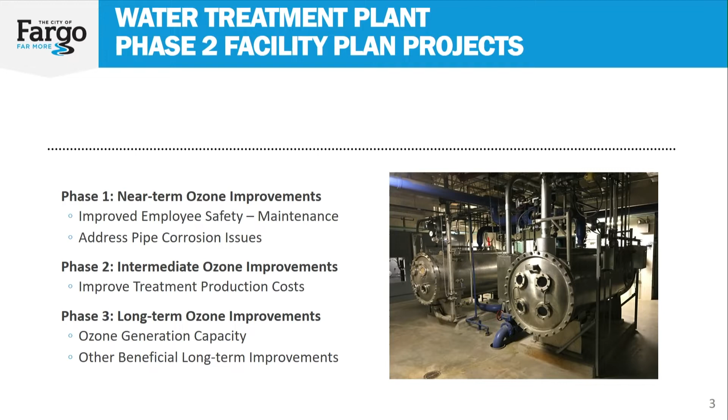As far as phase 2 improvements, we did a filter to waste project, which the Department of Health wanted us to do. So that construction's complete on that. We're looking at doing some work on our pre-treatment process and our softening process, which is basically just repainting and fixing some of the components that we need, wear parts that over 20 years of continuous use are wearing out.

And then the last one in that, it's high service pump station improvements. That's the pump station that pumps water into our water tower. So we're going to look at that, look at some electrical updates and address wear on pumps there.

And then the last one I have, we did some source water monitoring a few years ago, and per EPA requirements, we have to get a little bit of additional credit for disinfection through our existing treatment plant, not the lime softening plant, not the membrane plant. So the lowest cost alternative there was to install in our existing building. We found a spot that we could do it there, so we'll be installing UV treatment, just UV light through the water, and that'll fulfill that disinfection requirement.

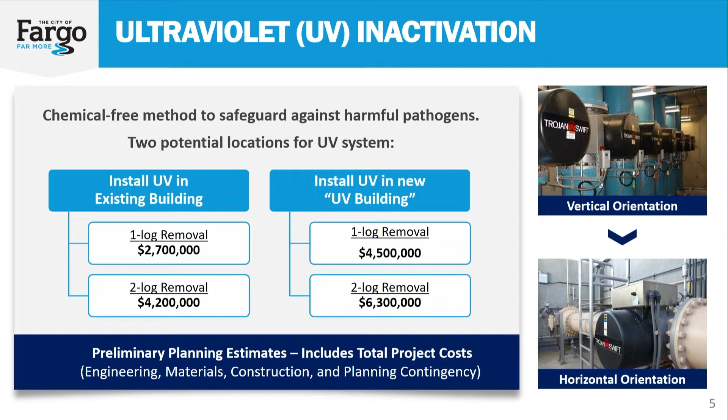But that's it. I know it's very brief, but if you have any questions, I'd be happy to answer them. It's just to fulfill an SRF. Troy, the total amount of your loan is how much? The total amount is $24 million. Any questions of commissioners?

Just Mr. Pepcorn, a couple quick ones. So this is a low-interest loan from the state of North Dakota, and so this is a program that they did that we're taking advantage of, correct? Okay, and then one follow-up.

Could you talk a little bit about the reconfiguring of some of the lines? I know you don't have a diagram, but could you talk about that and how much you saved?

That's very impressive. We're still assessing the cost, but we're feeding reverse osmosis water. Customers have been getting that since late last September through the new plant. We haven't sent finished water out of the new plant, but every month it appears we've saved money over the past, and we're well into the six figures as far as cost savings. So we're really happy about that.

So what you presented in finance, the pipe change, has changed our cost in chemicals and such. And the secondary thing is the taste is still wonderful.

It helps with the taste, and we've actually been monitoring that all through the flood and everything. We've had a good spring as far as taste and odor compounds and stuff.

Usually in the spring you have some odor issues. We've been monitoring our source water, and there was a time when we would have considered switching to the Sheyenne River because of concern about taste and odor compounds. But since we had the data, it showed the river was fine, or that the Sheyenne was actually worse, so we kept on.

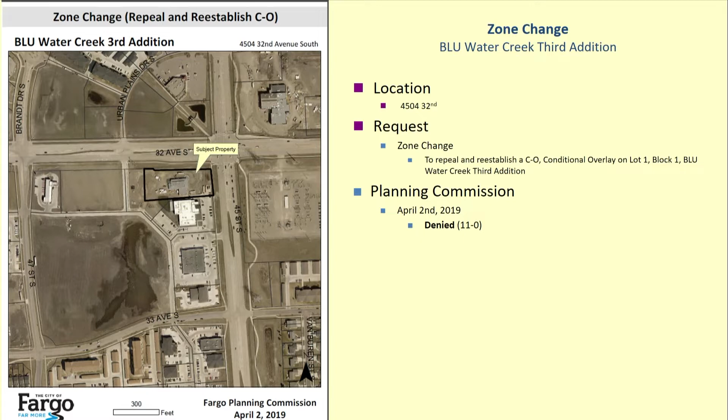So our first case is the BLU Water Creek 3rd Addition. This is here on 32nd Avenue South and 45th Street South. Again, there is an existing conditional overlay on this property. These conditional overlays include design guidelines for both the buildings and the site. As we look at that with the zone change, that accompanies the LC limited commercial zoning there. And one of the guidelines in that conditional overlay prohibits off-premise advertising, that is billboards, on that site.

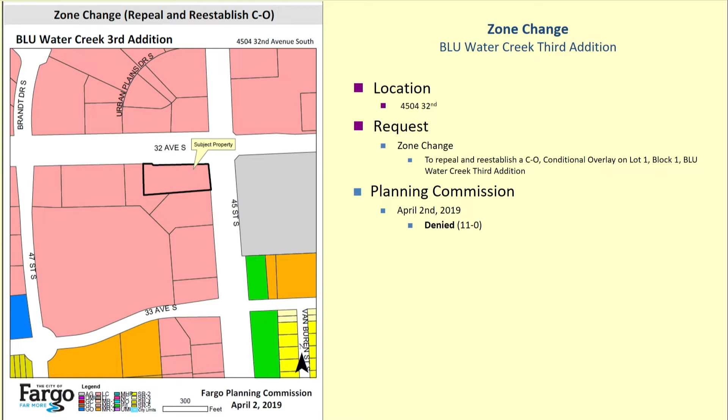The applicant is requesting to repeal and reestablish the conditional overlay in order to allow an off-premise sign. Here is a plat of the BLU Water Creek Addition. So again, here's 32nd, 45th. This is the approximate location of the proposed sign.

The prohibition against off-premise signs was included in the original conditional overlay for this property in 2003 and has continued to the current conditional overlay despite other modifications that have been made to that original conditional overlay.

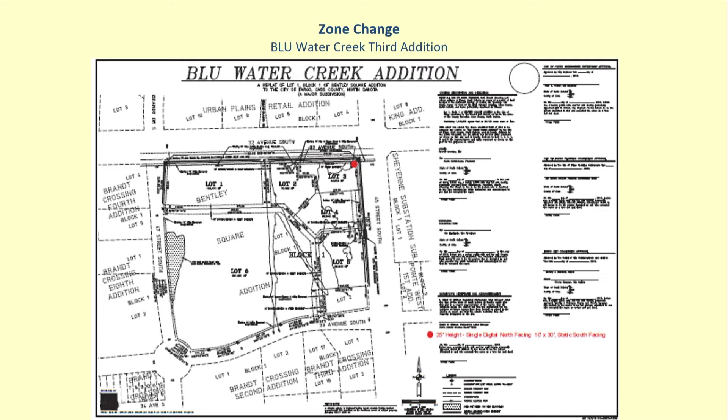And so the sign detail here, these images were provided by the applicant. This sign actually is oriented to read from 32nd. It sort of looks like you can read it from 45th there, but it's really oriented from 32nd here. And again, here's Urban Plains across the street here.

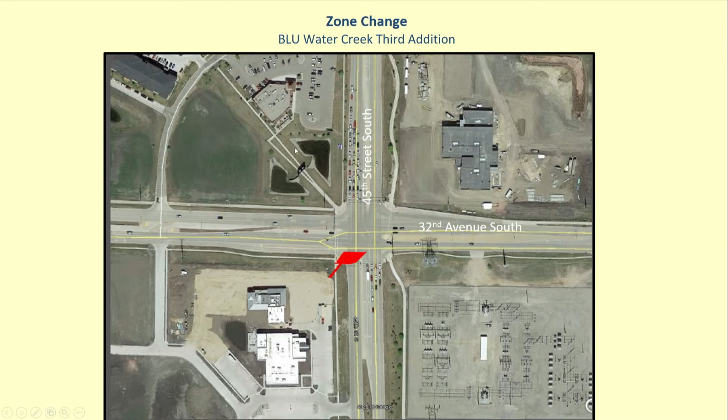That just shows the height of 25 feet there. This would be a 300 square foot sign face with a height of 25 feet. It would have a digital sign facing east on 32nd, and a static side facing west along 32nd Avenue.

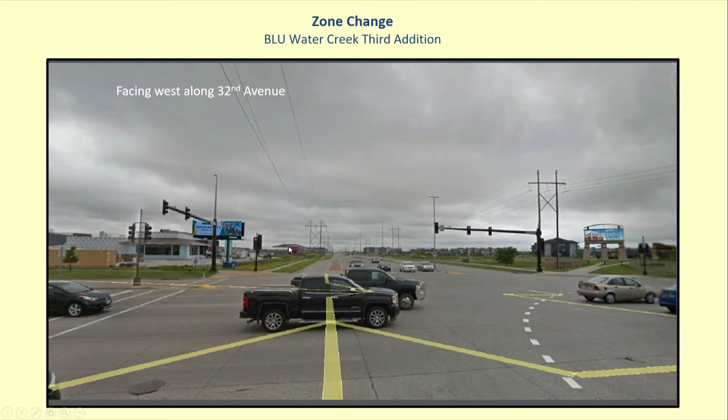Here's a photo simulation again. So here you're facing west along 32nd Avenue, and this would be the static side, and then the digital side would be on the other side. So this is proposed. This is about where it would be.

That's the existing actual Urban Plains sign. There probably is not a stripe across the truck. That's something. So that's our first location.

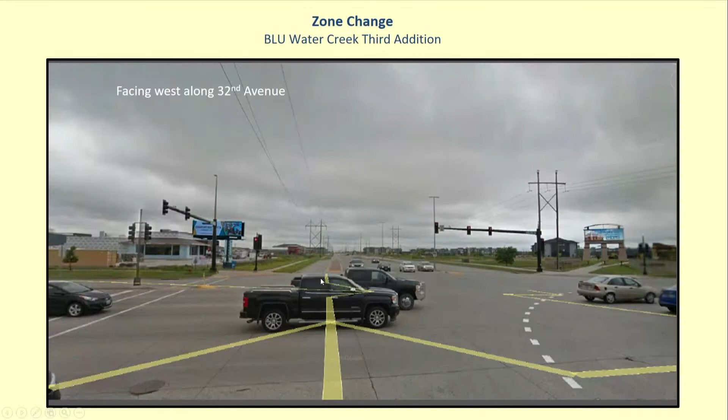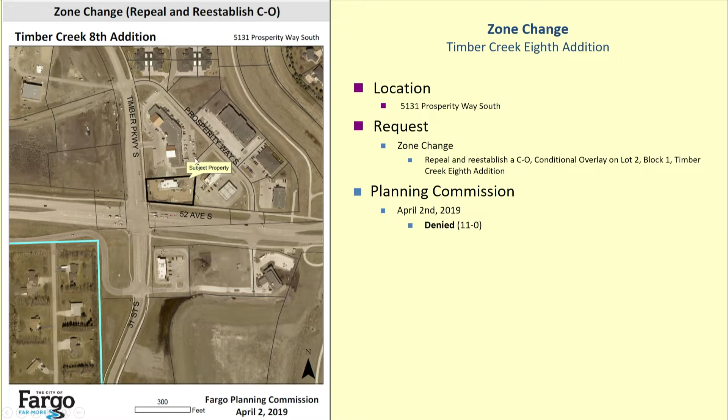And that's location number 1. Location number 2 is the Timber Creek 8th Addition. Here we are on 52nd Avenue South, Timber Creek Parkway. The cash-wise is over here. Again, this area is zoned GC General Commercial.

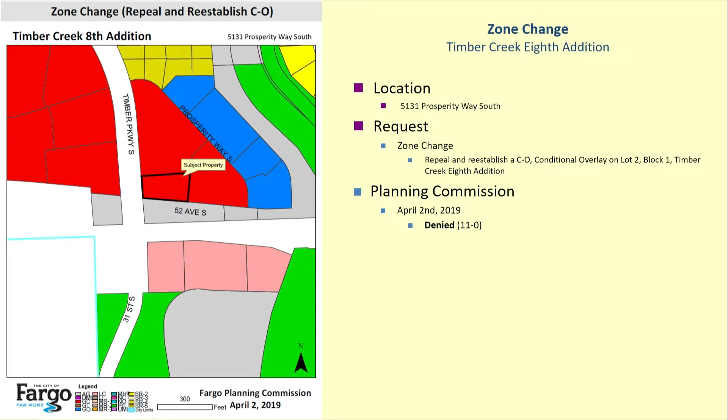Again, this has a conditional overlay that the applicant wants to modify to remove the prohibition on off-premise signs. That one was again in the original conditional overlay and is continued in the current conditional overlay. So here we are down here, approximate location of the sign.

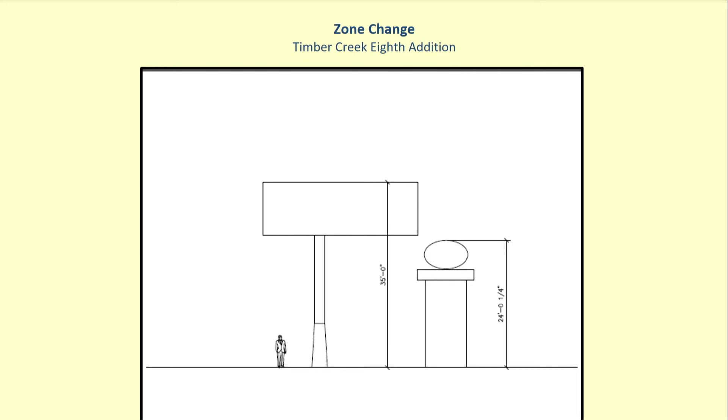We have some more photo simulations from the applicant here. Again, this is facing on 52nd. This would be a sign of 35 feet high. And it would have 2 digital sign faces, one facing each direction on 52nd Avenue.

So here's, again, a simulation. Here's 52nd out here, and here we see the location. There's the Dairy Queen, our landmark there, and the approximate location of the sign.

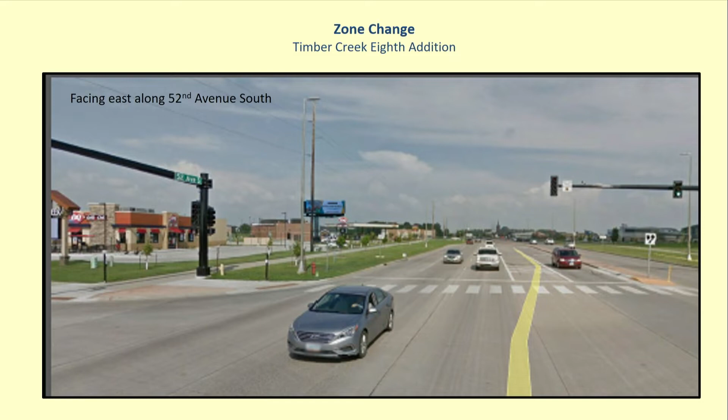Commissioners, these and a couple other cases which are not before you at this time were presented to the Planning Commission at the April 2nd Planning Commission hearing, and staff had recommended denial of these requests. The Planning Commission affirmed this recommendation of denial by a vote of 11-0, a unanimous vote to deny these signs.

The basis for the denial is stated in the findings in your staff report. The proposed modifications would be opposed to the original intent of the conditional overlay. The City of Fargo has many conditional overlays along arterial roadways south of Interstate 94 that prohibit off-premise advertising. There's a lot of billboards south of the city and more toward the Main Avenue area, but there's a space in there where there isn't any off-premise advertising.

As development along corridors in the southwest area of Fargo began, including the corridors of 45th Street South, 32nd and 52nd Avenue South, and Veterans Boulevard, many of these areas were intended for commercial or mixed-use development that were zoned with a conditional overlay that established design standards for the development, among other things, and also prohibited off-premise advertising. The intent of this prohibition along the corridors was to not replicate the many off-premise advertising billboards found on Main Avenue and University Drive South.

Approving this application would establish a precedent of how these corridors will develop, and it is likely additional applications will be submitted to make similar requests. The Planning Department doesn't feel that approving these modifications to the conditional overlays to allow off-premise signs would be going along with the intent of those and keeping the look we want for those entryway corridors to the City of Fargo.

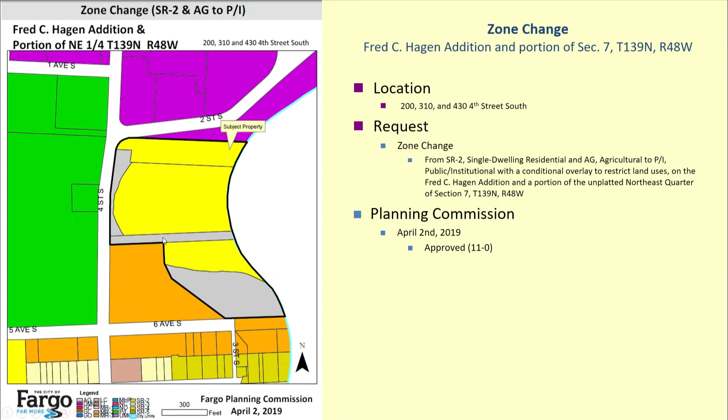Commissioners, I believe you'll all recognize this location as the area where Dike East and Dike West is, the skate park. Across the street is Island Park Playhouse. There's a City of Fargo lift station up here. This area is zoned: the yellow would be SR2, single dwelling residential, and the grayish blue there is agricultural. Here we see those uses laid out. Just for reference, this is Prairie St. John's. They are not part of this zone change, but that's just a reference point. And the dike that's there, and the facilities here on the Dike East.

So this is some people refer to it as a cleanup zone change. The applicants here are the Fargo Park District and the City of Fargo. The city owns this piece up here, and then the park owns these larger pieces. The request is to change from the existing SR2 and agricultural zoning to PI, public and institutional. The SR2 zoning is not appropriate for this location, as due to its proximity to the river, it can't be developed with single dwelling residential uses. As the property is owned by the City of Fargo and the Fargo Park District, both governmental entities, the PI zoning is the appropriate one.

Also added to this is a conditional overlay, a little different than the way we used that term earlier. This conditional overlay restricts the land uses basically to the ones that are there. The public and institutional zone is used all over the city, and it's possible to put a variety of things there. For instance, the city garage is in the PI zone, and you wouldn't probably want a big manufacturing thing right down there by the river. So again, it just restricts it to the uses that are there.

Those are enumerated in your staff report: parking, the City of Fargo lift station, the skate park, and the Dike East and West parks.

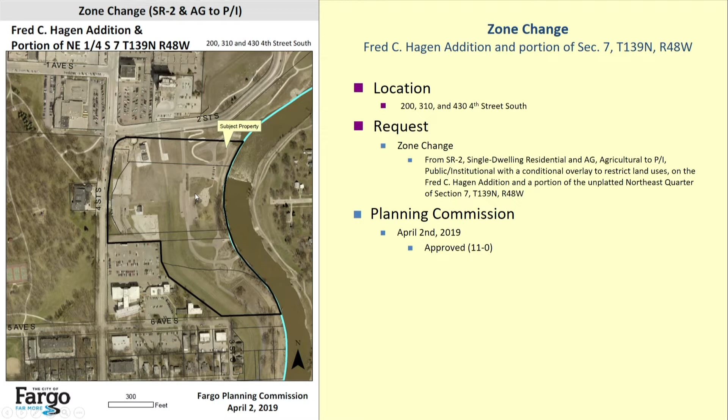At one time, this part of Fargo was once part of Moorhead, and the river was altered in course. Mr. Johnson, was it 1962 that we did that? Okay, and it was modified. And if that name Fred C. Hagen sounds familiar to you, Mr. Hagen is a former city commissioner, and there's a plaque commemorating his service to the city on the 3rd floor of City Hall. So that ties that together.

The applicants, the Fargo Park District and the City of Fargo, are here. Well, I guess the Park District is not here, but we don't believe we have any comments. Does anyone present wish to speak to this zoning change? If not, we'll close the public hearing. Can I have a motion? So moved. Is there a second? Second. Moved and seconded. Any further discussion?

Roll call vote, please. Grindberg. Aye. Strand. Yes. Piepkorn. Aye. Gehrig. Yes. Mahoney. Aye. Thank you, Commissioners.

Thank you, Donald. Thank you for reminding us spring is coming, Donald, too. I like that green jacket. Appreciate it. Thank you. I got it in Los Angeles on my recent trip there.

Kent Costin presented the recommendation to extend a loan with Wells Fargo totaling $100 million for a 2-year period. Kent Costin to explain. Yes, good evening, Commissioners. I'd like to tee this up and have John Shockley actually go through some of the detail of the terms and conditions of this renewal.

This loan is for $100 million, and it's an extension of the loan we took out to provide diversion funding. I'll let John explain that. It's the same structure, essentially, for a 2-year renewal commitment.

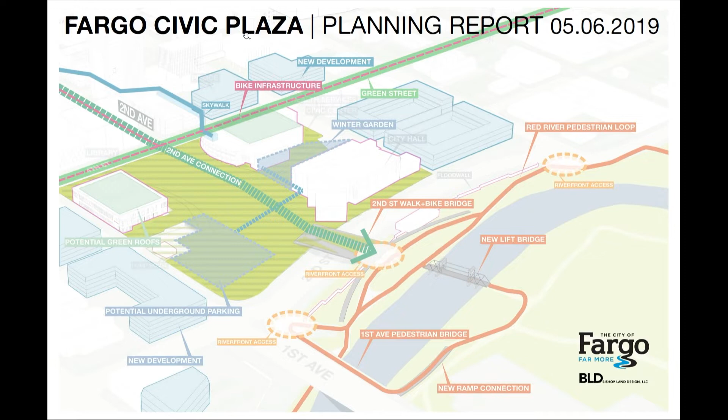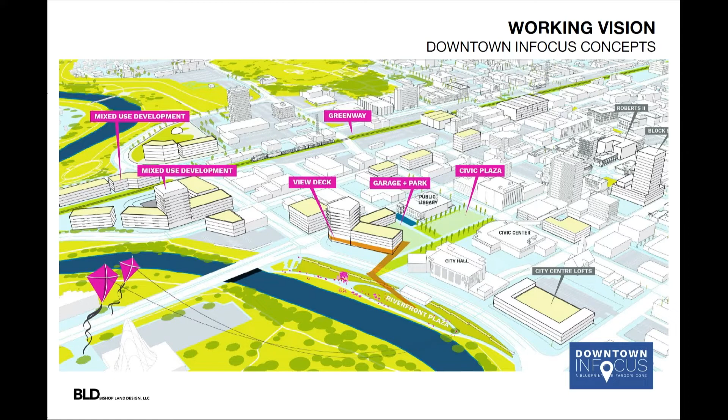Initially, this work has come out of the Downtown InFocus work that we did starting several years back, and that's where we really saw the potential for the Civic Plaza to be a key and critical part of the downtown redevelopment. We are in the process of building this vision.

This vision is really about trying to understand how we conceive of a public plaza of this nature. It's a civic plaza, so we came up with this little equation: it's about democracy, it's about ecology, and it's about program. To us, that's what starts to form a civic plaza.

But there's much more. It's about talking to the people that are part of this process. You can see we've talked to many folks in the city of Fargo, several commissioners along the way, the Performing Arts Center Task Force, which I'll outline a little bit of the work we've done there, the Plains Art Museum, NDSU, et cetera.

You can see in this particular slide the spatial relationship between all these people and the importance they can bring to the table when we think about programming, as well as how we connect to each one of these entities. So we've been touching base since November and through April with all of these folks to understand how they can play a role in the formation of the areas surrounding, feeding into, and the plaza itself.

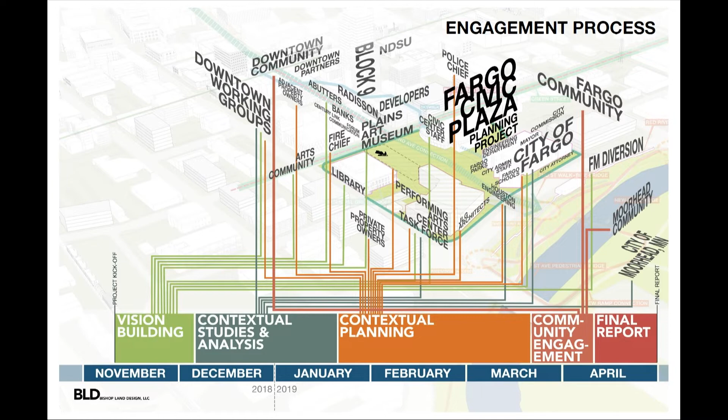So we know that it's tied to a bit of history, right? We know that it's tied to the river. It's about what Fargo is historically, but it's also about how we understood the civic space.

Going through this process, we want to make sure that what we're looking at is actually capable of being a civic plaza, and that has a lot to do with how we understand programming in terms of celebration, gathering, discourse, as well as understanding other precedents to make sure we can understand the scale of this space and if it is appropriate.

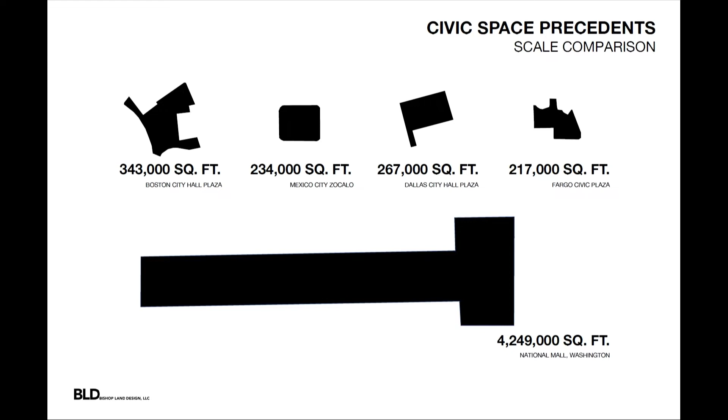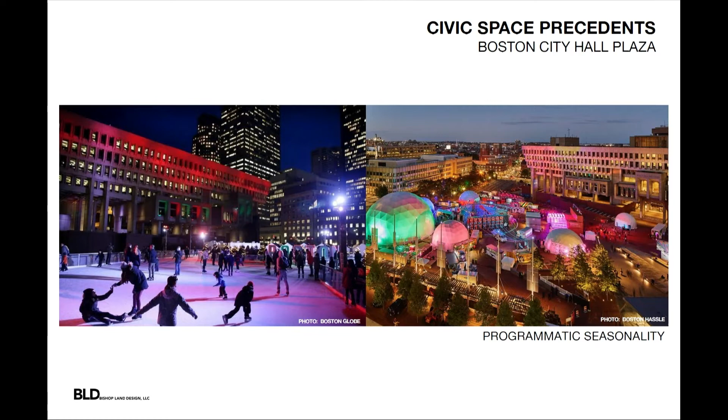So we looked at a couple different spaces and their key and critical features. One was the National Mall, certainly a different scale. Sometimes we understand our scale by understanding that other scales are too big. So it's not a national mall, but it is a civic space like we've seen in Dallas. We look towards the things that are successful in the future design of that plaza: programmatic flexibility, understanding programmatic seasonality like they do in the Boston City Hall Plaza, and understanding civic expression like they do in Mexico City.

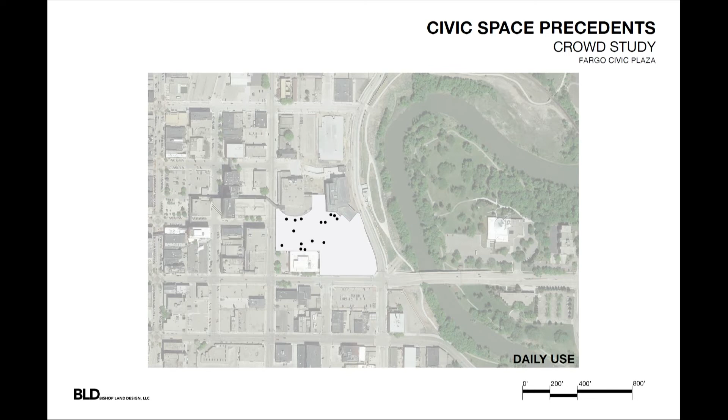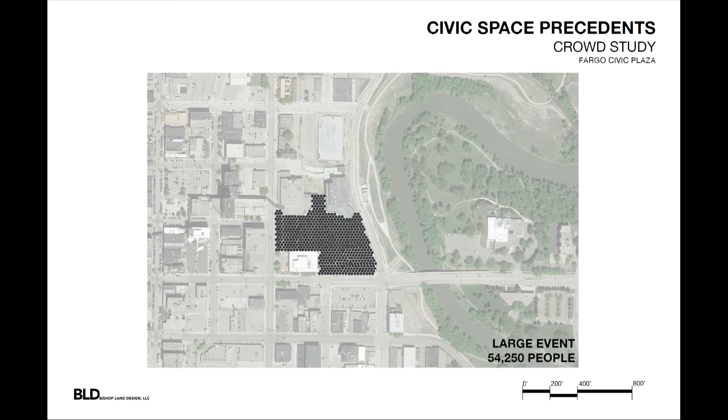Each one of these things looks towards a scale, and the thing that we did to prove out whether or not this was the right scale was to look at the populations that each one of those civic spaces would hold, as well as what this space can hold here in Fargo. What we have found is that this space is actually to the scale - we can fit up to 54,000 people in this space. So it's not small, and it's a place where all of Fargo can come to gather.

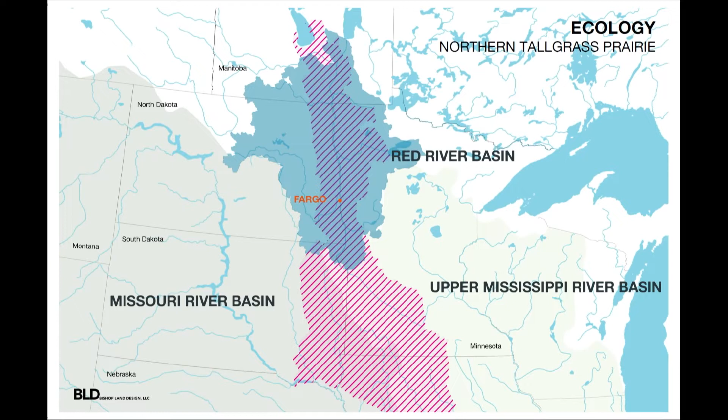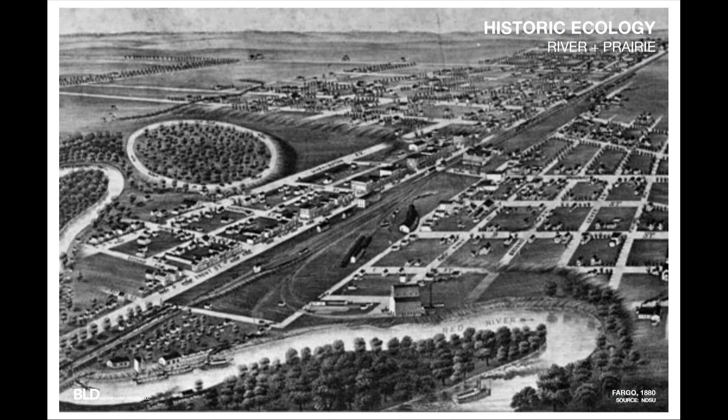Ecology, as a human ecologist, but also as we've talked before, is something that's very important to this city, and making the connections that are key and critical for the health of species and the planet. In terms of the relationship, many of us think about the northern tallgrass prairie, but in essence this relationship is also about the riparian forest. This forest was what helped build Fargo over the years - there would not be a Fargo without a forest, they say.

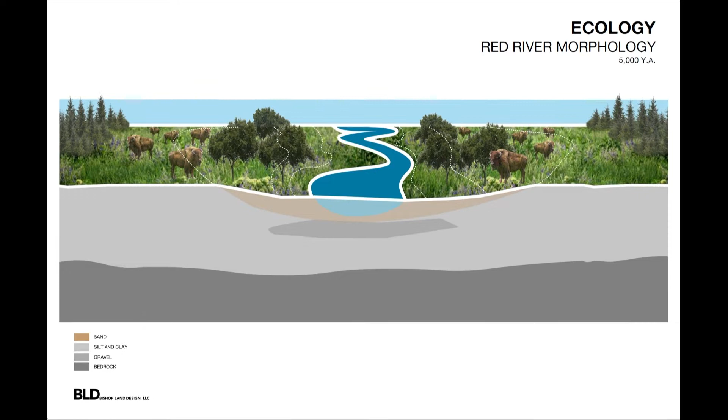We understand that there are challenges in Fargo related to the river morphology and the ancient glacial lake that was once here. So we understand that some of those challenges are going to be part of how we manage the space, and we do that with living materials. Hybridizing the river ecology, as well as the urban ecology and plant ecology together, is how we start to think about the potential of this particular plaza.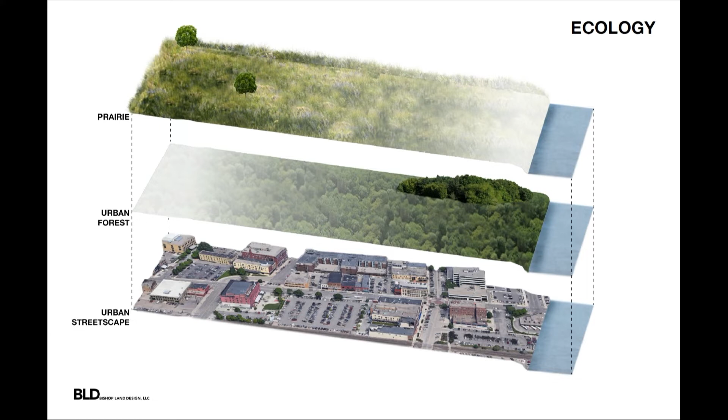Prairie, urban forest, and streetscape, all of these together actually bring the functionality and help us understand how we might manage stormwater, as well as give a unique place for people to be.

Understanding this also leads us to understanding hybridized infrastructure, right? Things that are hard and things that are soft, and how they go together, and how we combine living and static things. We understand that writ large in the city is into how we manage stormwater.

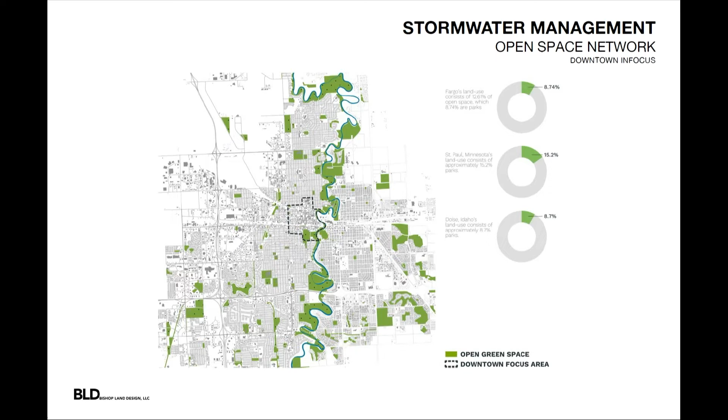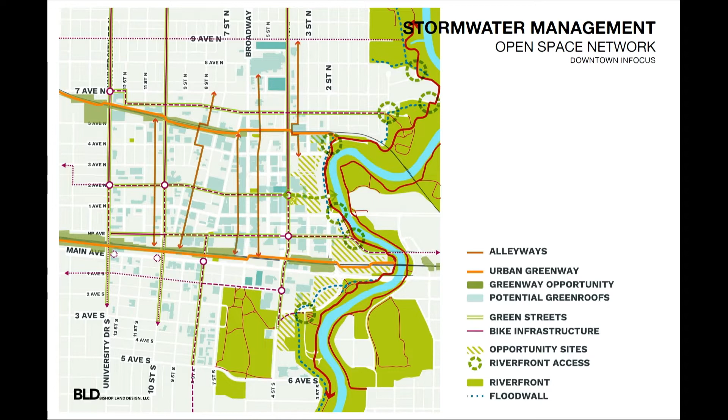Water is an important resource, as we heard from before, as well as an important resource about how we manage locally. It's tied very much to the open space network that we talked about in downtown Fargo. How is it that we can make sure we have connectivity through living systems, as well as how we might manage this on the plaza itself?

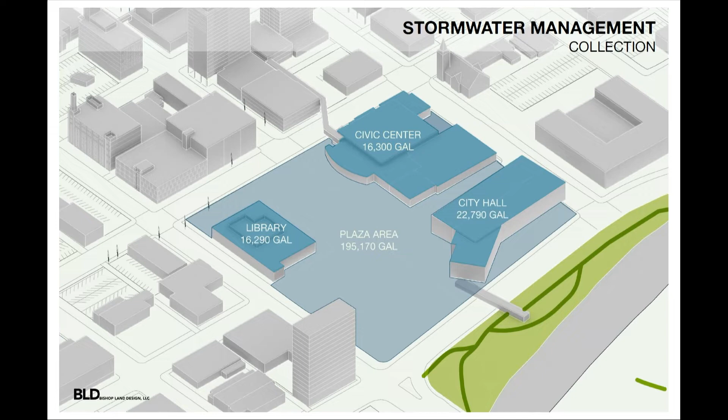Thinking about this more specifically, we can actually start to do calculations. We can understand how much water is actually generated in a year on each one of these hardscapes per se, and how much water we could collect even just from roofs and plazas to be utilized in this space.

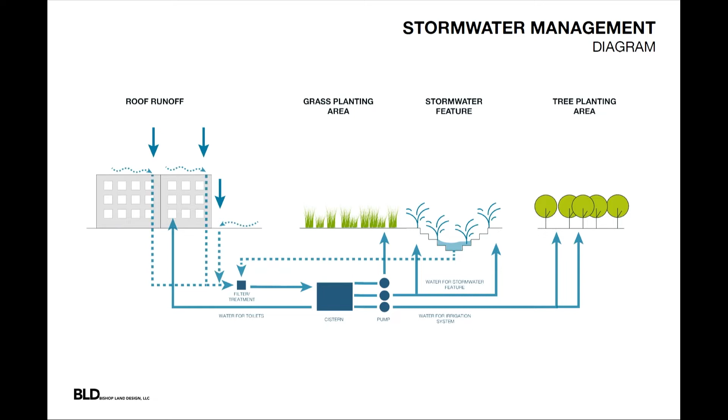What we might do with that is actually starting to think about - do we start to use it as irrigation? Do we start to use it as some sort of stormwater feature? Do we start to reuse it in buildings or in tree plantings? All of these are great potentials for us to understand how to reutilize this important resource.

These things can occur as a hardscape or they can occur as a softscape, so we have a lot of opportunities as well to think about that.

It's very important as part of this process to understand the space and analyze the space. In essence, if we show you a bunch of pretty pictures and they're not true, when I come back later and tell you we can't build it, it's not a good thing for any of us.

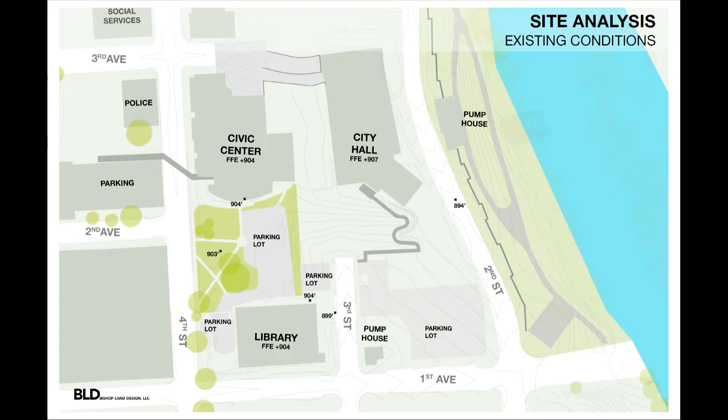So we want to make sure that when we look at this space, we understand there are complexities, and this is just an existing condition map. But in essence, if we look at it under all the jurisdictional overlays as well as the utilities, we understand this is a much more complex space, which has its own rules and regulations that we have to follow, both from a natural course, but also from a utility standpoint.

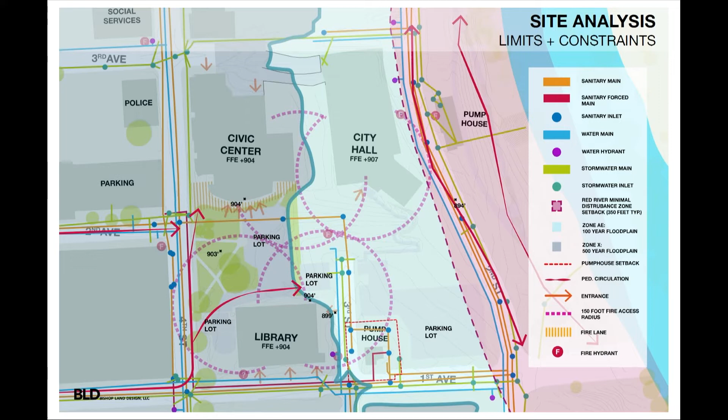So if we take that and try to understand the context as well, what are the things that influence the space and how we use those in design?

We've done things like study how the shadows work throughout the year and throughout the day. Is there a warm spot? Where are the cool spots? Where are the windy spots, right? Where can we utilize the cooling action of the city when it's most necessary?

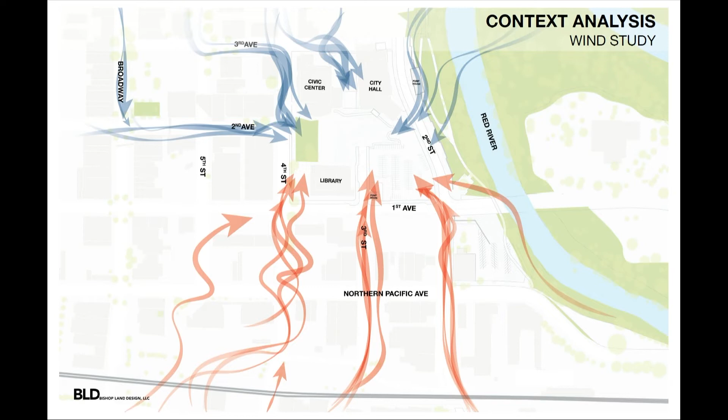You can see 2nd Ave is quite a windy corridor. I think you all know that, as well as how that fits into the larger imagined networks that we've worked so hard on in the downtown planning process.

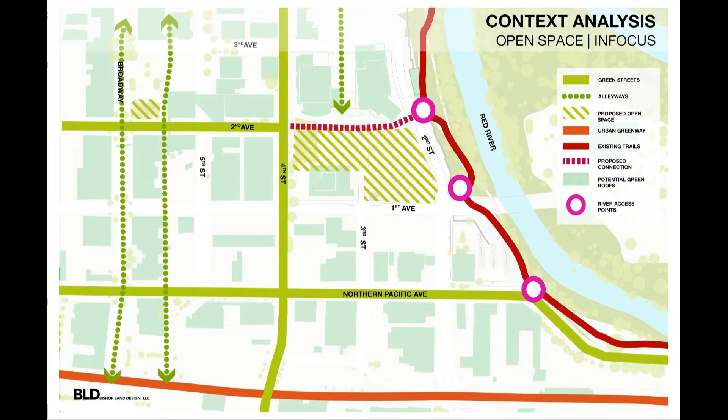So we've taken a closer look at some of that contextual planning, because the success of this space is actually tied to its externalities, not just the things that happen on itself. So we've come up with this idea of the expanded network - how do these open spaces connect Broadway and how 2nd Ave makes its way to the Civic Plaza?

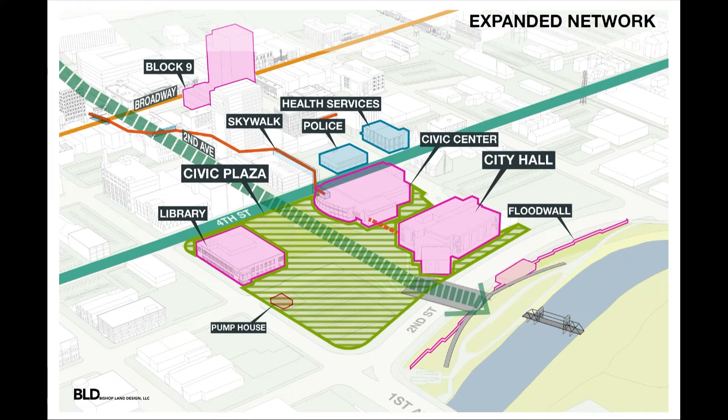This again reiterates the work that we've done previously, but now we start to understand what might actually happen in some of these spaces and how we can reorient them specifically towards the uses of the plaza.

First of all, we consider how we make that key and critical connection to the riverfront. This is something that we have lost since the flood wall has made its way in front of this space. So we've talked to staff, we've talked to Fargo Parks, we've talked to many folks that we've engaged with about how we might actually accomplish this.

In fact, this was one of the goals of the diversion, to connect via a bridge. I think what we've tried to do is give that a spatial quality and understand how that connection can be meaningful. So we looked at 3 options.

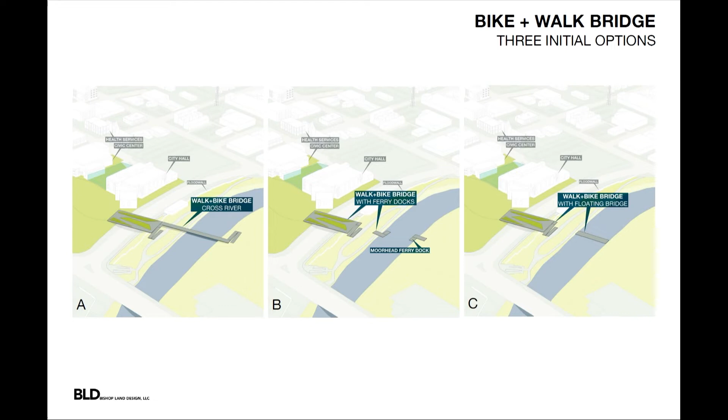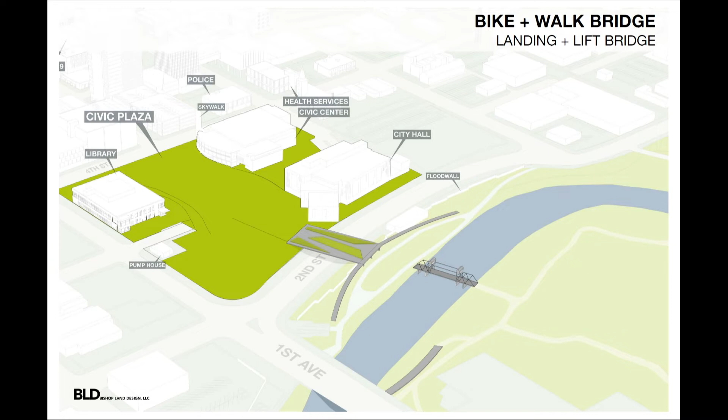We found out that none of those were right. So we came up with a 4th option, which is really this broad connection that allows us accessibility, but also a secondary connection to Moorhead that we believe helps unify the 2 banks of the Red River. It also connects to a larger expansive north and south network of space along the river.

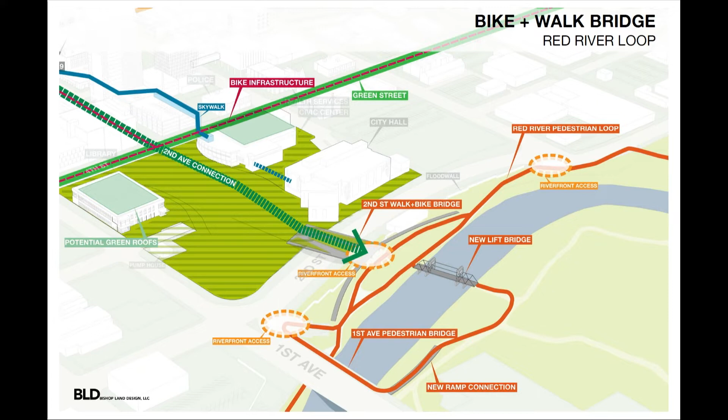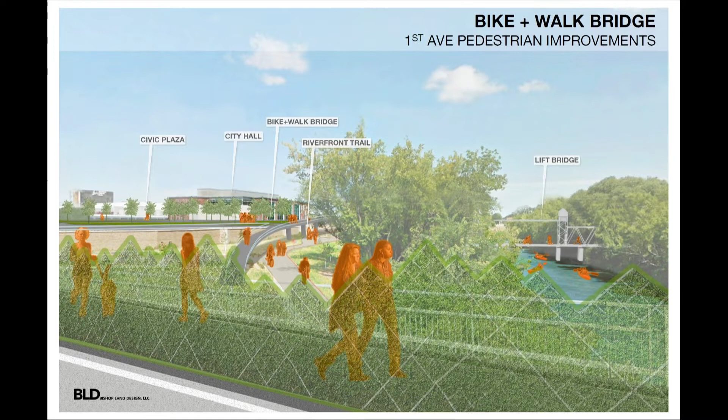Once we key those 2 things together, the expanded network and that riverfront open space, we actually activate much more of this continuous network that will help build Fargo in the future. We also looked at what this might mean in closer detail: how do we take those connections over the bridge and enhance people's understanding of the river, but also protect them from what can be a somewhat hostile environment along the bridge.

2nd Avenue also plays a key and critical role as we look to connect Block 9 to the Civic Plaza. We looked at 2 options: one was a reduced roadway, another was looking at this as a shared use corridor, or as some of us with Dutch heritage say, a woonerf.

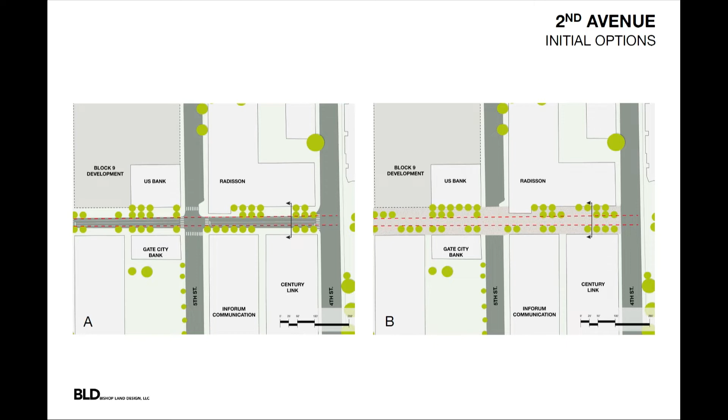That means cars and people share space, and that may not be jointly at the same time, but it can be. It allows us to close off portions of the street for events, and it also slows down traffic when it does share that space with pedestrians.

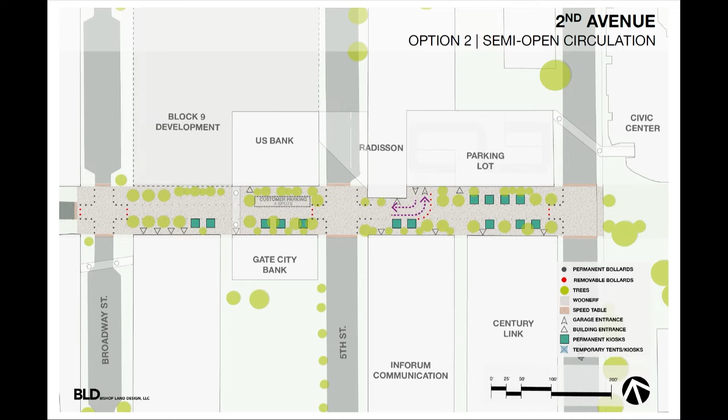We've also talked about putting in permanent kiosks to help activate 2nd Avenue, since its current facades are unable and unattainable for activation. These kiosks work better than a hot dog stand where you can't get out of the weather if you're buying a hot dog; in the wintertime you'd be able to utilize these kiosks. We still allow access to the parking lot and garages, and we look for ways to enhance that later on.

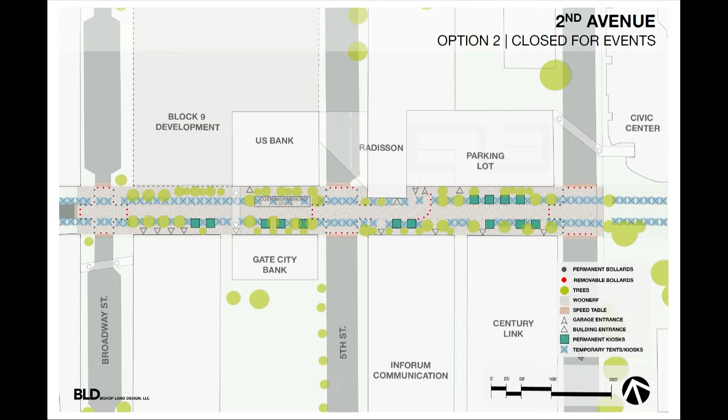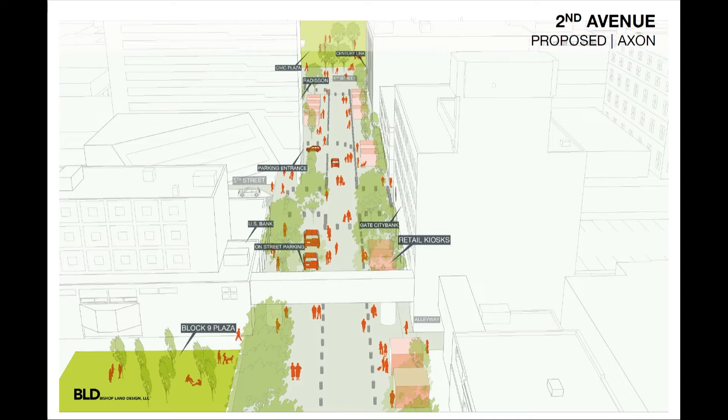During events you can also fill in the teeth, so to speak, and make this a very large and activated space connecting from Block 9 all the way to the plaza. This proposed axon shows the type of activation and the types of elements that would be in this particular space and how we would see that connection occurring.

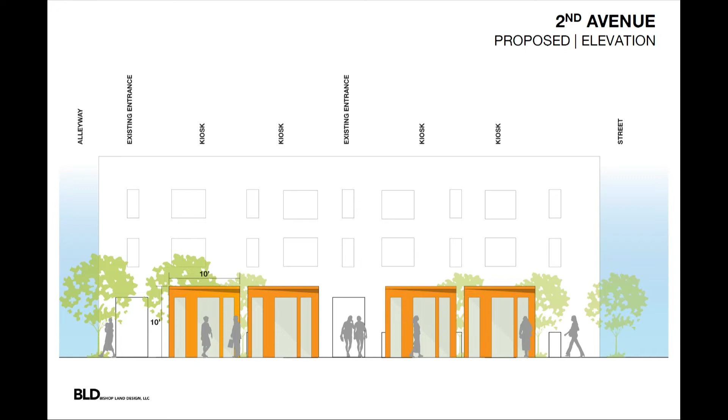The kiosks themselves are small, micro retail, and they allow people to start businesses and then grow them into other larger spaces. Being conditioned, they allow folks to get out of the weather, whether it be rain, sleet, hail, or snow—like today, it's fine just to be outside, which is nice. So these kiosks actually help activate that street and bring folks together.

Briefly on 4th Street, the real goal here is first to calm traffic down and bring that plaza slightly out into the road profile. This allows us to do some of the enhancements we talked about in the downtown plan, capturing stormwater off that road and bringing it onto the plaza as an element or as irrigation.

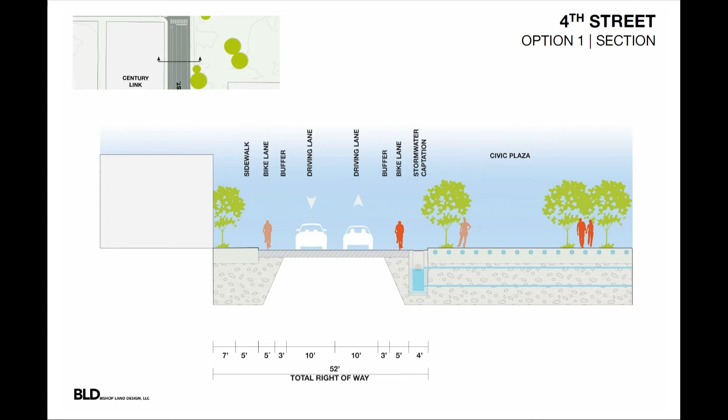So the contextual planning outcomes really create this kind of expanded network, which we talked about, and we can see how it activates all of the development that potentially surrounds this plaza. That's where the true value of the plaza is—not only for civic enhancement, but also to enhance and increase development in the core.

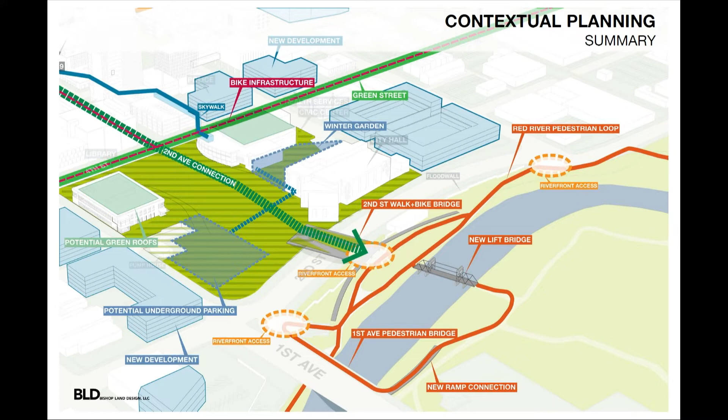Some of you may remember my presentations for the Performing Arts Center at the task force meeting. We believe you've winnowed down to one particular scenario. We presented 3: one was the Civic Center site, one was the southeast corner of the plaza, and the third was the Mid-America Steel site. Looking at each one of those, we believe you selected the Civic Center site.

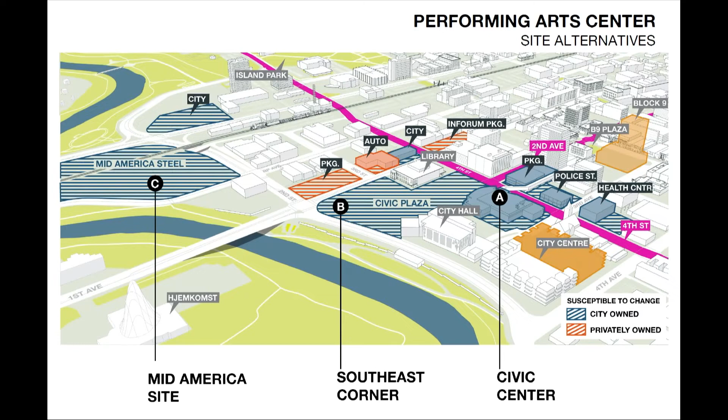We are showing that even that allows for some further study, because we have the Performing Arts Center going in and replacing the current Civic Center. The fact is that we could keep that all plaza.

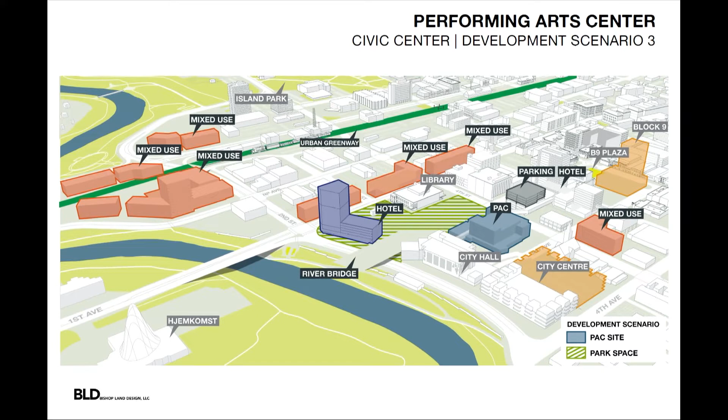We could actually look at some mixed-use development in the southeast corner, or there may be even higher-use hotelier options for that particular site. So we are still considering what that might mean for the plaza, but it is a way to think about how we actually modify this space.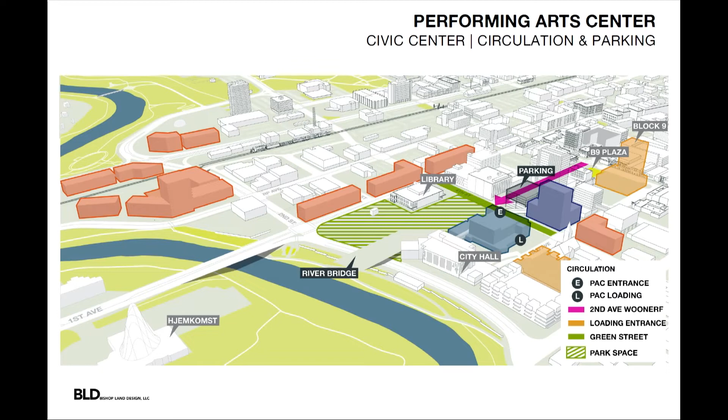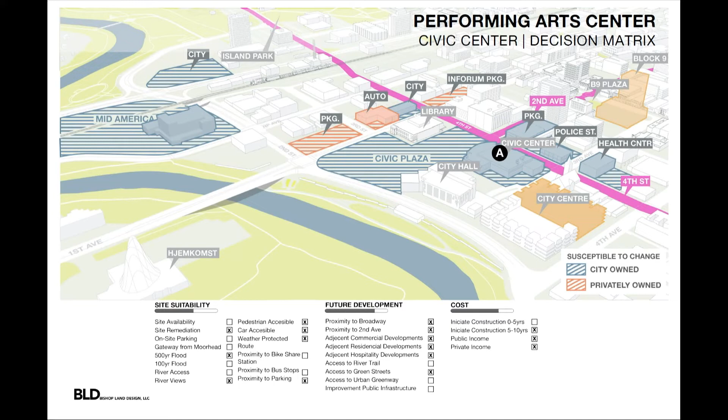The nice thing about this particular option, and we went through a deliberation to show the strengths and weaknesses of each of those 3 sites, is its true connection to the Skywalk as well as the connection to 2nd Avenue. You can see in this slide how we rated this option: site suitability is great, as well as future development potential, and costs are much less than what we would find in something like option C at the Mid-America Steel site, as well as the timeline for development.

So this is of particular interest for us in terms of the work that we've done post the community engagement. So much of this work was out in public. Some of you may have seen it in some locations. Certainly we talked to the press about it, as well as given a presentation to the general public. We posted boards at the 3 libraries, each one talking about the process we were going through to understand contextual planning as well as analysis.

And we went out into the press to make sure that we could get some responses from the public input survey that we put out there. I don't know which one of you have taken that particular survey, but it seems like many folks did, as we had nearly 500 responses in only 2 weeks.

We're seeing a lot of responses from the core neighborhood. That's actually really good if you want to make a successful civic plaza, because they're your adjacent users. And to further that strength is the fact that those people utilize the downtown for work and for pleasure.

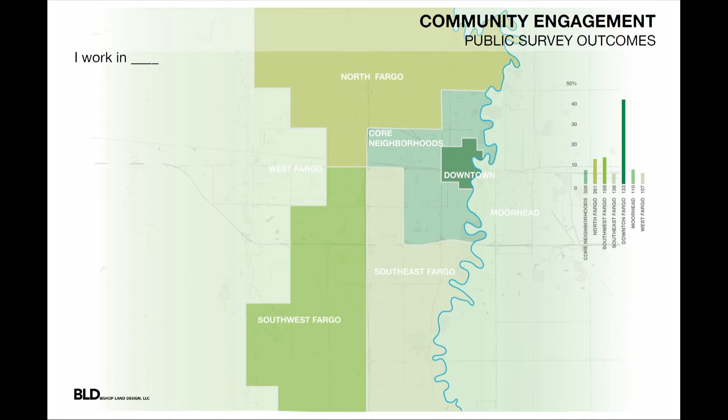So understanding really how often people are down here, right? What we're trying to make sure is that this can be a success. And so by looking at how often folks are down here, we do see that there is a lot of opportunity for people to utilize a space like this. Nearly 8/10, or 80%, of people are either downtown multiple times a week or every day.

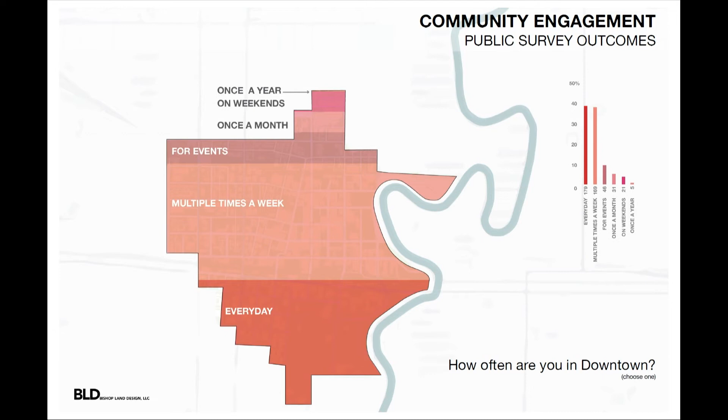Looking at transportation, we can see that many people still drive, but this is an opportunity for us to think about how we program that plaza and integrate transit.

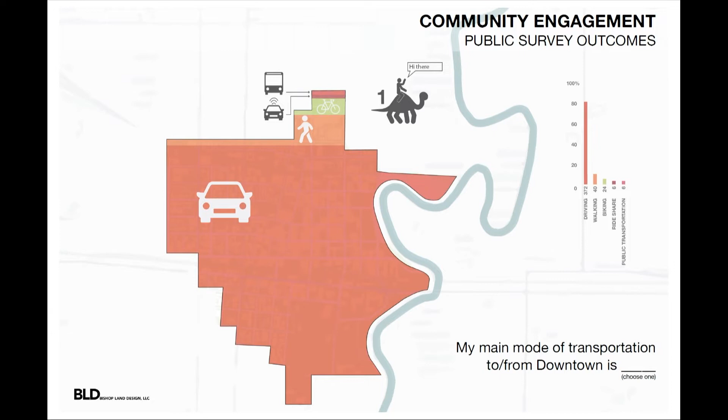We also had one person that responded that they took a dinosaur to work, so that's why you see that. Okay, no laughing on that one.

Street fair and farmers market are big responses, as well as NDSU events and even the St. Patrick's Day parade. What we did see is that not very many people are accessing the river, so that exemplifies our need to make that key and critical connection in this work, right? We want to make sure that we allow folks to really take advantage of that resource that you have.

Also, we try to understand character. This helps us out when we get into the actual design process. What do people feel that Fargo is? What do they believe the character to be? Many folks believe that the downtown, as well as the river, were the predominant shapes of what the character of Fargo is, as well as winter, for that matter, which reminds us of how we need to make this plaza four-season active, right?

I couldn't ask for better results in terms of what they believe a civic plaza should be, right? A venue for public events, of course, vegetated green space, public park, and a community gathering place. These are all the things that make civic spaces great.

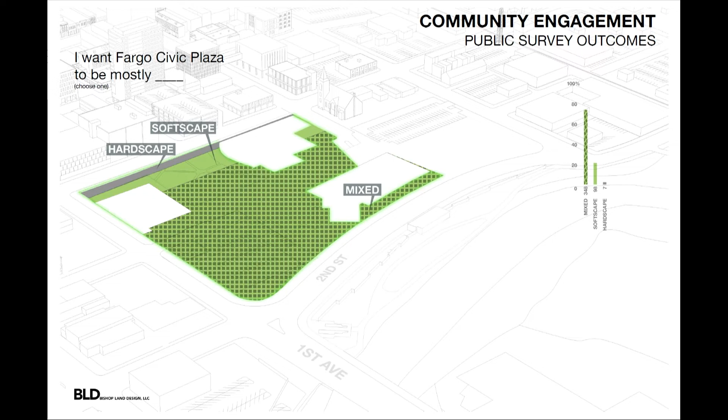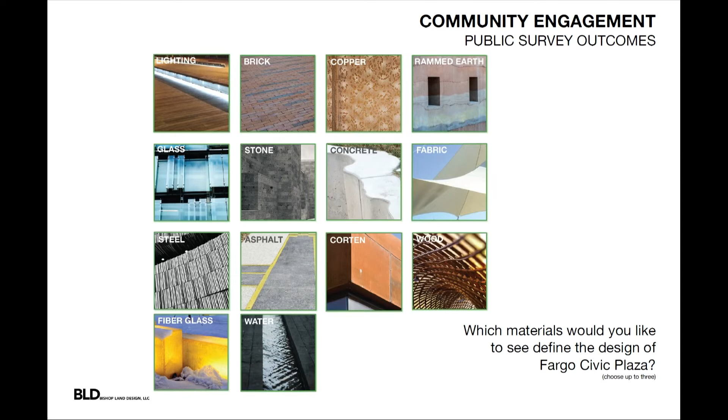It is a fairly large space compared to the Block 9 Plaza, if you would see that space. So as well, we're trying to understand the materiality and other approaches that might define the design in terms of material.

What we have found, interestingly, is that people are very attached to the idea that this space would have water within it, as well as making sure that we have lasting materials like stone and brick, although making sure that we have warm materials like wood, and that the space is well lit - lighting is key and critical to the identity of the space.

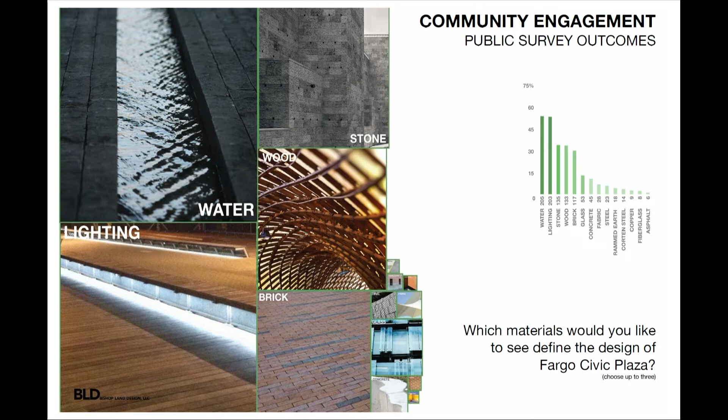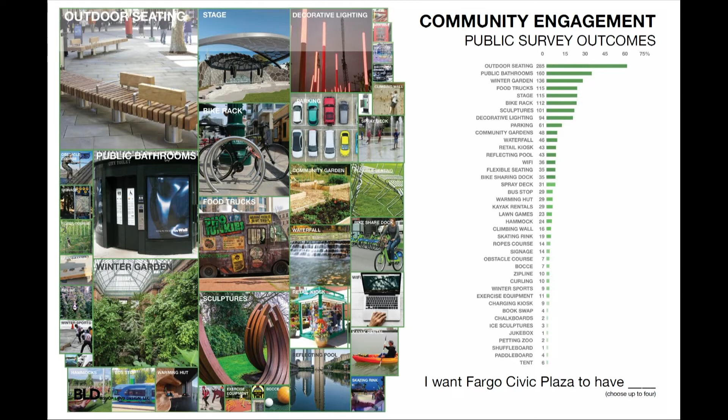So in essence, when we look at the ecological components, we see that they've reflected what we believe that to be in our initial analysis - supporting that urban forest initiative, making sure that we have native plants, as well as the idea of having water features and fountains, and contemplative places like lawns, but also interest like sculptures and art installations.

Community engagement also suggests that the activities are those consistent with those in civic plazas: marches, public markets, civic engagements and rallies, concerts and performances. This is a space that can hold those types of things, and we believe that these are the needs as well.

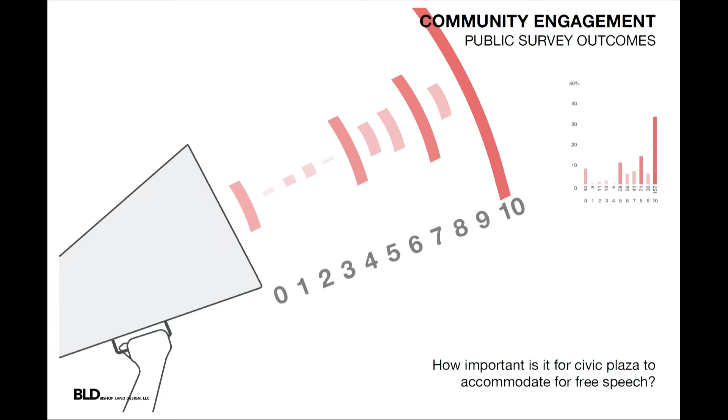As well as this key and critical idea that a civic space is part of the democratic dialogue. We wanted to see how people felt about the free speech accommodation in the space, and a high majority says that it's one of the most critical, important things about this space. So understanding how we deal with that aspect is critical to its success as well.

Pedestrian friendly, a place for families - these are things that we hear consistently in Fargo, and we believe them to be part of its identity as well. And welcoming to all, and things that we believe we can achieve as we continue on with the design.

We look at ways to analyze not just bulk data in these surveys, but we can actually kind of create characters and understand how they might each utilize this particular space. So that's just a design tool that I'm making you guys aware of.

As well, we can cross-cut data to make sure that we understand. This one is in particular looking at the question of the character. So although we know that the people in downtown like the downtown, we wanted to make sure that those that were not in the downtown also like the downtown, and we had confirmed that with this particular data.

Out of all the questions, half of the respondents in all other neighborhoods still felt like the character of Fargo was downtown. You'll see in your booklet that we have other comments that people have made that we thought were of interest, and these are specific comments that people added to the survey question.

So what do we really know? The relationship and the connectivity of the river is critical. Core neighborhoods are very engaged, and they're the likely users of this plaza, which is great because you have high density and people more likely to use that for all 4 seasons. In that, you have a captive audience that is keen for events.

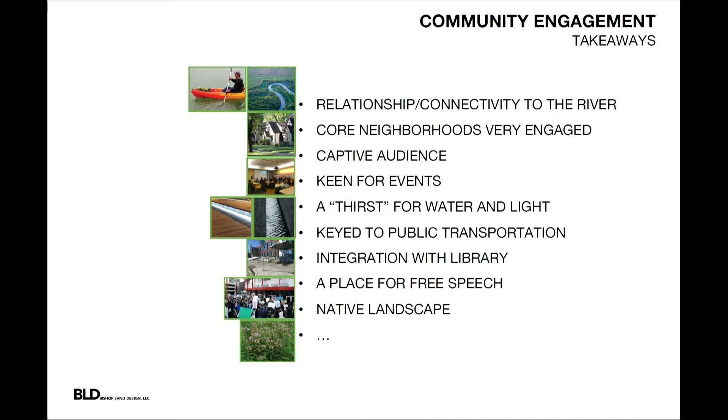The idea that we have some sort of water and light integrated in the space, and that we try to make sure that it's part of a transportation agenda. People believe that the integration with the library was very critical, and that it's a place for free speech as well as native ecologies. So that really starts to wrap up our work, but there's a key and critical component to this plaza, which is the installation of the sodbuster sculpture, which is actually something that we need to think about in very short term.

So Sodbuster, since it hasn't been around for a while, I just wanted to make sure everyone was up to speed. It's a sculpture by Luis Jimenez, his first public commission. It's a fairly large sculpture at 24 feet, heavy, with a value of about $500,000 estimated.

The true value of this is actually in its cultural identity. It's key and critical - you see it on your postcards, you actually have beer named after this particular sculpture. This is something that is very important to Fargo as an icon.

Jimenez also had a career that was unfortunately shorter, but very successful in terms of how he created sculptures for various cities. You can see he created sculptures for Denver, Albuquerque, and Wichita. You can also see versions of Sodbuster at the Met on display as study works he did before implementing this key and critical work.

So we understand this to be an important piece of Jimenez, but also an important piece of sculpture for the city.

Where has Sodbuster gone, you may ask? Because of 20 years of heat and cold, snow and rain - the things that happen in Fargo - but also some of its placement next to a nearby train and traffic, it sustained damage as well as issues with its structural integrity. So this sculpture was actually put into conservation via a grant.

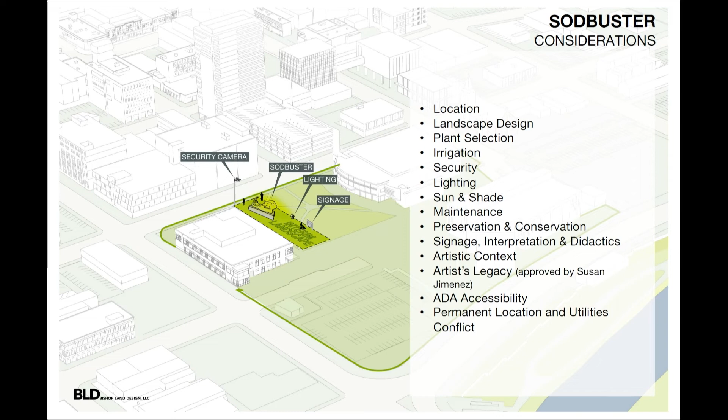So our goal is to honor that - a time frame of installation by, I believe, late September. So how do we get to where we're going from there?

There is a lot of work outlined here - some in relationship to the plaza, some related to sod buster itself. Our goal is to really think about how we now create a vision for the plaza itself, but also how we actually get sod buster in on time.

At that point, I'm open for any questions. We can go back to the beginning if you want, or anywhere else. Thank you very much, good presentation.

So this is part of the reason we're discussing this tonight - Sodbuster's coming back, and as a commission we have to decide whether to go ahead. The first part of the plaza development would actually be placing the sodbuster. The other elements are all broken up on how we have to handle those types of things, but this is kind of a question to the commission, so I open it for discussion.

Comments? Commissioner Pepcorn? Go ahead. I don't know, I mean, go ahead.

I'm just going to say, a great presentation, and there's a lot of potential development and a lot of work's gone into this, so it looks like a wonderful set of options to move forward. As far as Sodbuster goes, we don't have many options, right? Because you don't want to put that in any area that's not developed yet, because then it's going to have to be moved again. So are we somewhat limited to options here?

Well, that's part of the next steps, which is for us to conceive of the plaza in a way that we know we've placed Sodbuster in the right spot. So there is a bit of co-development that needs to take place. There's a concept design for the plot, the plaza and the bridge and the potential development area, so that we know we aren't going to interfere with how we set Sodbuster. At the same time, we'll be developing an idea about how that Sodbuster landscape works, so that when we set aside the rest of the plaza, or come up with these great visions and ideas, which we hope to work with you all on, we understand Sodbuster can move forward and is in the right location.

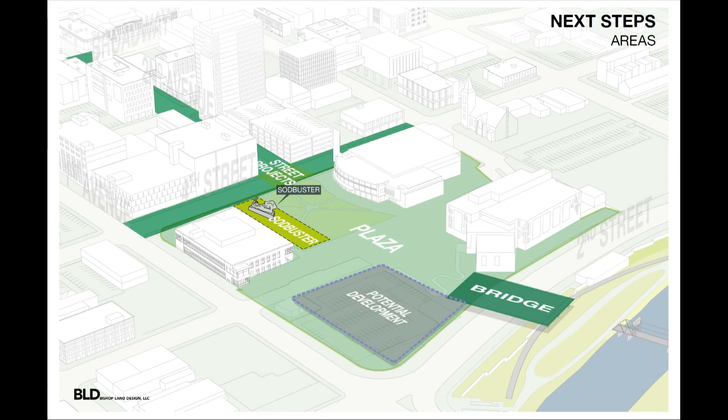I think what he's referring to is that where the Sodbuster was before, it was truly totally exposed. That's right, it's just a horrible place.

Can I just add a couple of quick things? It's very exciting, and I think the other good thing is we can start on this plaza now because we kind of know the lay of the land. You know where city hall and the library are, those are fixed, and so even the potential buildings, you kind of know their elevation. Can you talk a little bit about that? That really we can do things now, and basically it's set.

Yeah, and that was one of the things we had. We had a lot more questions before we started this process, trying to figure out, okay, well, where would the Performing Arts Center go?

Is it even going to be here?

As we funnel down to make decisions, we know the Performing Arts Center would at least be on the plaza, and that it's more than likely going to be where the Civic Center is. All of that helps us understand this is basically going to maintain its elevation. So as we look at Fourth, which is another reason why Sodbuster is there, we understand that the change in grade for the plaza is least likely to happen along Fourth.

As we get closer to the bridge and the potential development, that changes dramatically. If you look at where we are in this building, how high up we are from anywhere, that's likely the elevation of the plaza, because we want to make the connections to all of the buildings.

That means we can understand, if we've got to get over a bridge and keep it ADA accessible, those all start to fix elevations within a range. That also helps us understand how a development might key into that site and have both a street front and a plaza level.